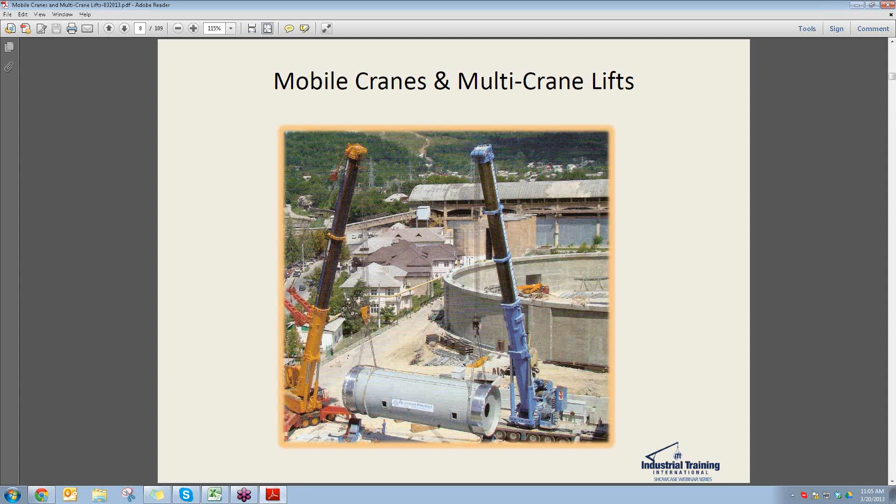Just a note about the slides here. A lot of these slides are mine, and a lot come from elsewhere, but they're picked to prove a point or expand a concept. Most are from the petrochem area, mainly because that's where the photos are. But just because everything's big, long, and heavy doesn't mean the same principles apply throughout the industry, whatever you're lifting. And although you'll see cranes with names on them from Europe or South America, I'm not advocating any one.

When we talk about multi-crane picks, they're not as prevalent now as they used to be. In the past, they were prevalent because there weren't too many options. Some of those options were some of the most basic lifting devices that have been around for decades and even centuries. First, I want to talk about a few of these.

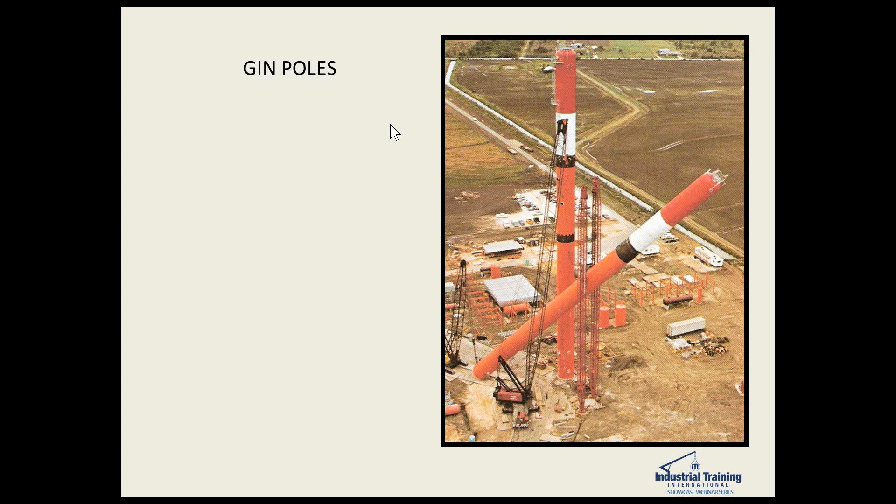First is gin poles, a beautiful arrangement of equipment where they take a pure compressive load and have tremendous capacities, but they're terribly inflexible. You also have stiff leg derricks, an amazing piece of equipment that works much like a crane, except their swing radius is not very large. When you start getting toward the lay legs, capacity starts dropping off quite quickly.

Then we have the guy derricks, which any of you engineers may recall from your statics classes, real and theoretical problems involving guy derricks and other kinds of derricks. Here's an example of a guy derrick lifting, with the loads being tailed by a stiff leg derrick. So this is a pure derrick operation.

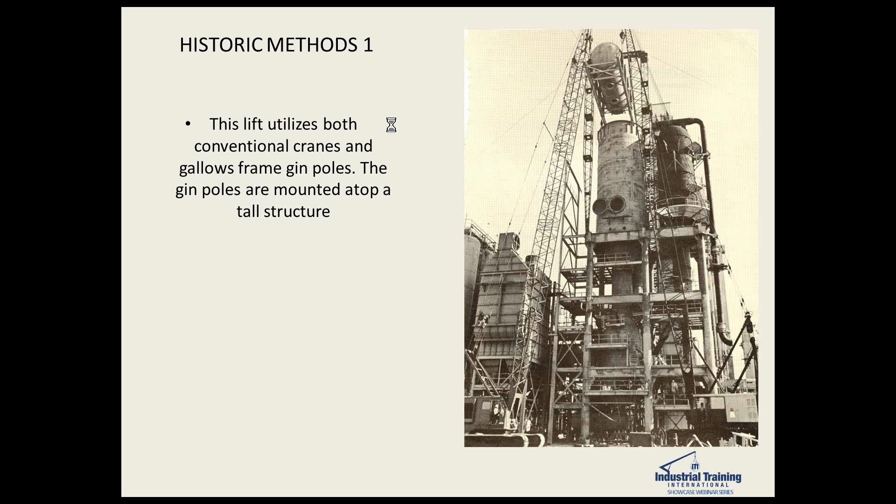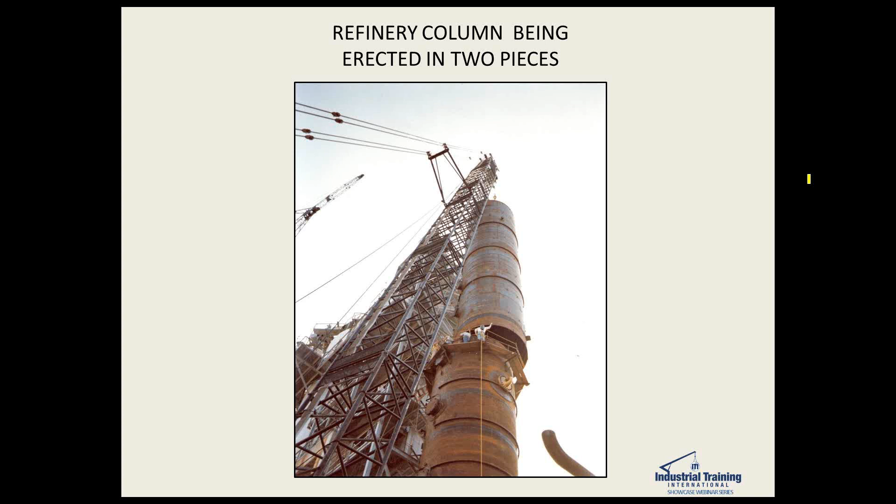Also, previously, a lot of pieces were erected in pieces. This is a typical example, a refinery column being erected in two pieces. And also, multi-crane lifts were popular. Here's one - I would guess this is probably post-war, sometime in the 1950s, from Denmark.

But I do want to point out, and I'll try to point out a few things every now and then, this excellent use of equalization on the rigging that they've used here to spread the load out properly.

In general, on two-crane lifts, some points to remember: keep level. The movement or motion of one crane may affect the other. The cranes should be derated. Most tandem lifts are considered critical. Some people - I've seen at least one case where someone banned two-crane lifts, period. I don't particularly agree with that, but I'm sure that's what this person, or this company, felt was correct. They require a high degree of planning, and if possible, try to balance the cranes' percentage of chart one to another, to equalize the lift between the two cranes, especially when you have two unmatched cranes.

The load falls need to be plumb or almost plumb throughout. The attempt is to keep them purely plumb. And in general, for every advantage gained with the two-crane lift, there may be a corresponding disadvantage.

Now I'm going to start with the lower risk items and work up to the higher risk multi-crane possibilities.

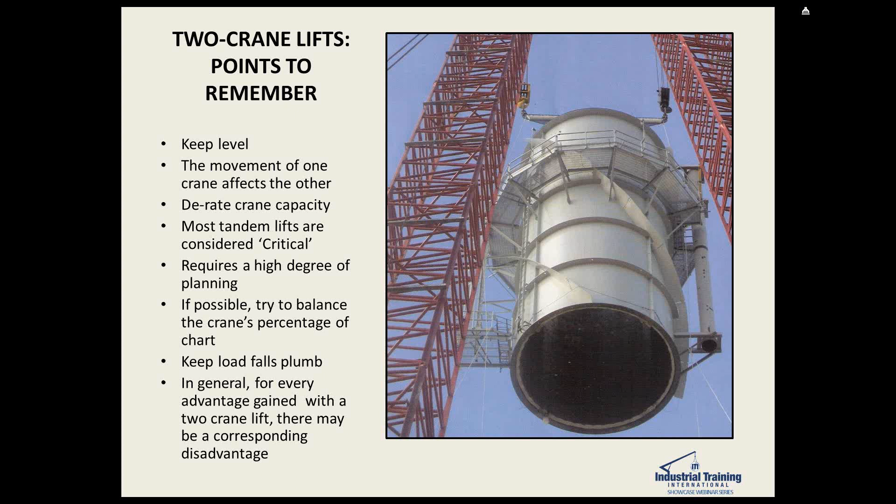Another important concept to keep throughout anytime you're thinking about multi-crane picks is weights, centers of gravity, and load distribution.

Now this case looks like a difficult piece to develop the center of gravity for. It's not really - it uses the same concept that anyone would use for a plate girder with stepped flange thicknesses, or a structural frame, or a container full of bulk material, or even a population center of the U.S. The same concepts apply. I do want to point out one thing here on this vessel, not applicable to two-crane picks - notice they have tailing trunnions, which are really a bad idea, and we'll see an in-use picture of that later on.

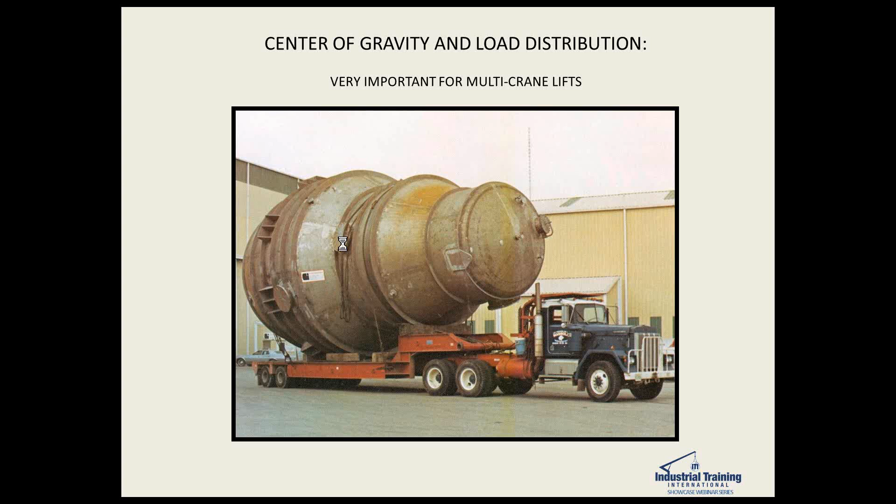Here's a case that happened within the last month. It started out as a single crane pick, but apparently the engineer of record did not tell the crane company where to pick up the load, nor did the crane company ask. When they picked it up with one crane, there was severe bending of the lower chords and the smaller members as well. They placed it down, and you can still see the lower chord being way distorted, and they're hooking up now for a two crane pick. I don't see any evidence of tie-off, maybe there is, I don't know. Here's a typical two crane pick, two crawlers picking up a large vessel just to pick it up off of the saddles.

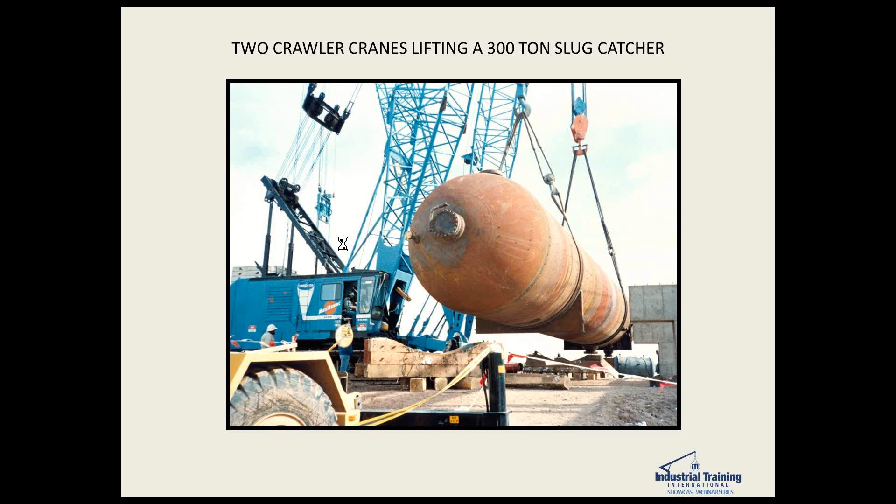Now, when you're working opposite like this and the hooks are closer together, any harsh movement in one crane might affect the opposite crane slightly more.

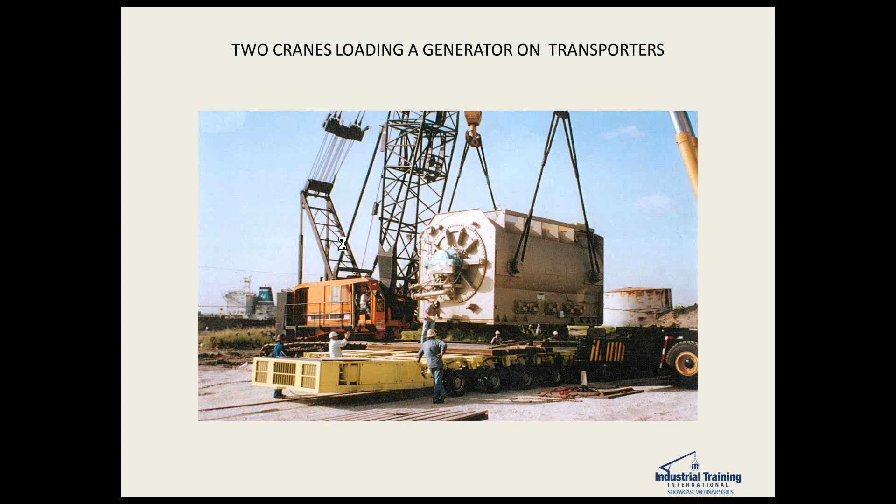Here's another case, setting a horizontal tank on the foundations. One thing that bothers me though is that they've got the rigging so close to the end here that if anything went wrong, they could have easily lost the load. Apparently they didn't, but that possibility still remains.

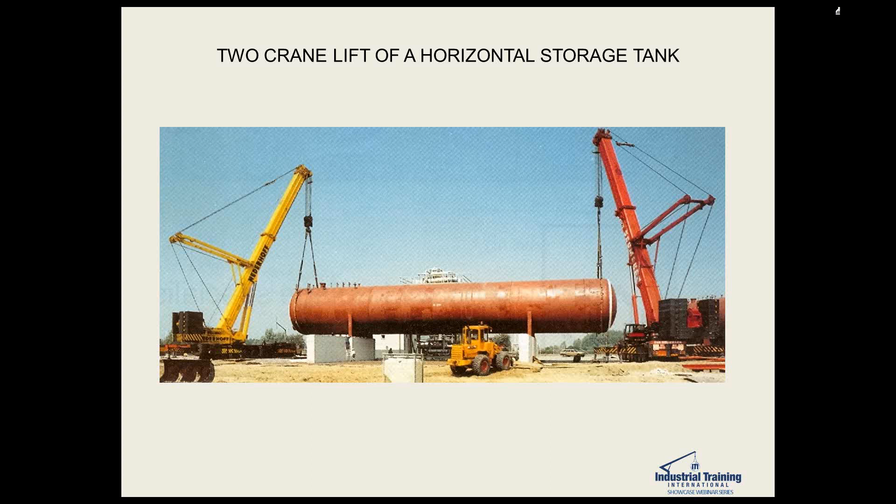Another good use for a two crane pick: here's a vessel being offloaded from a barge for highway transportation. To get it rolled to the right orientation for highway transportation, they used rolling sheaves, or snatch blocks is an option too for doing the rolling, and it can easily be rolled with the whip line. You don't see the whip line here because they've already got it into the orientation needed for transport.

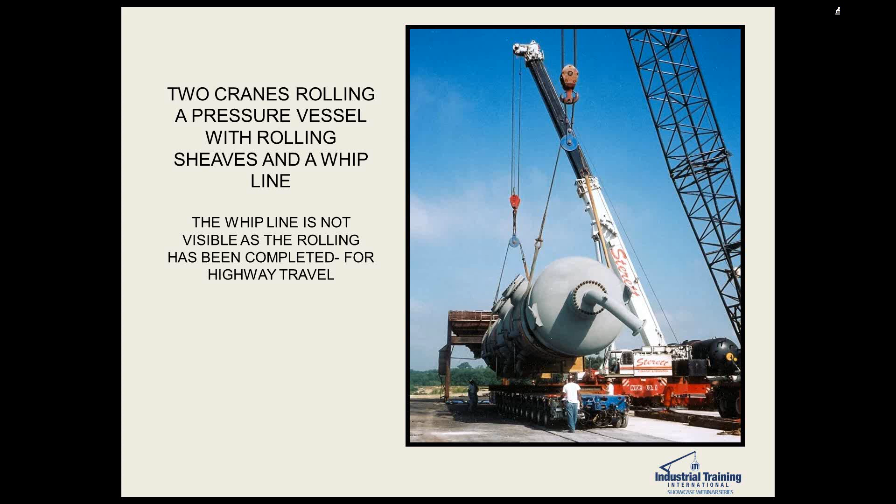Sometimes on a load like this, one end will be placed down before the other, which is fine, but there are rare cases where, especially if your center of gravity is way offset one way or another, you could actually wind up getting more load on one crane than you did before.

That same concept could apply here. This is where you have two cranes, one end has been placed down and they're getting ready to set the other end. I don't know what the distribution between the cranes was, but I'm sure this reliable contractor calculated the load in the cranes before and after the one end was set down.

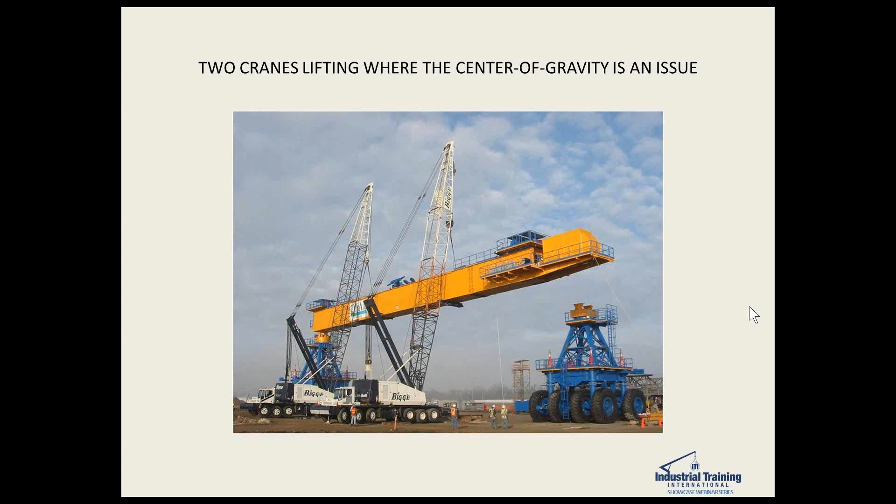Jim, this is Mike Parnell. This is an excellent observation of where the crane on the left, if he lands the load, then the crane towards the right may end up with 90% of the load -- right before he gets his end set down. It all depends on the CG, and all of it, and it's totally possible. You could double your load in some extreme cases. Right.

This lift was best for two cranes because of the multiple lifting points required. I'm not sure whether there are 8 or more lift points, but one crane could do the job -- it would just take quite a large crane with a lot of headroom to get all of your special rigging hooked up to it, and you'd increase your load with the weight of all the rigging.

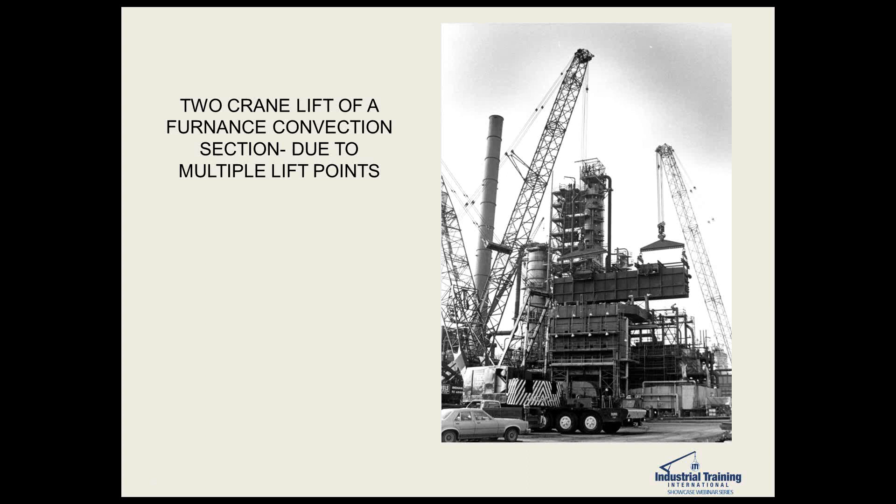This lift, although it's a two-crane pick and a horizontal lift, the cranes really can't see each other, so the signalman has to be very skilled for this. Also, it's high, so they need a second person to direct up on the roof.

Here's a very good example of where a two-crane pick will usually be preferred, rather than trying to put this enclosed conveyor section at the desired angle and have to deal with chain falls, come-alongs, and special rigging that may or may not be properly calculated.

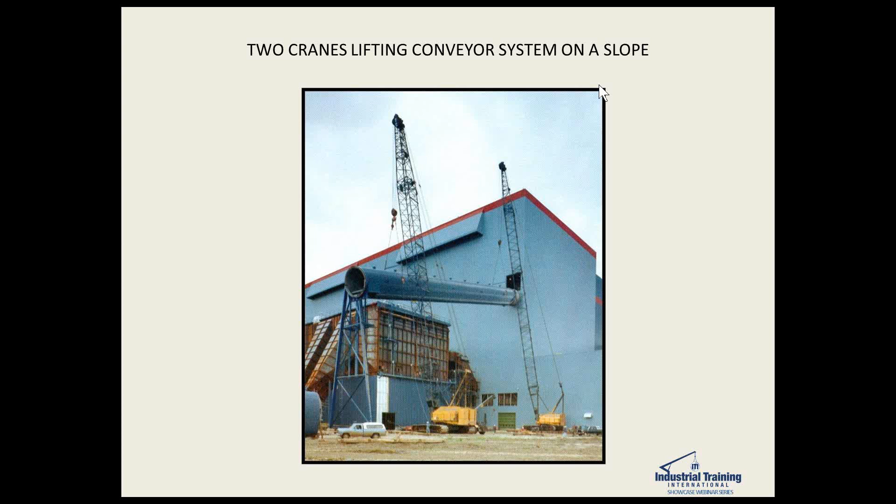This is a case I've only been involved with once, and I never want to be involved with one again. This is from when cranes were much smaller than they are now. A 75-ton vessel had to be moved from the roadway into an enclosed area inside a refinery. A 200-ton crane on the right took one end, and a 60-ton crane in the street picked up the other, transferring the load midway to a 140-ton crane to bring it into the enclosed area. The problem was that if this had been dropped, the explosion would have made world news, because there's a 600-pound ethylene line there.

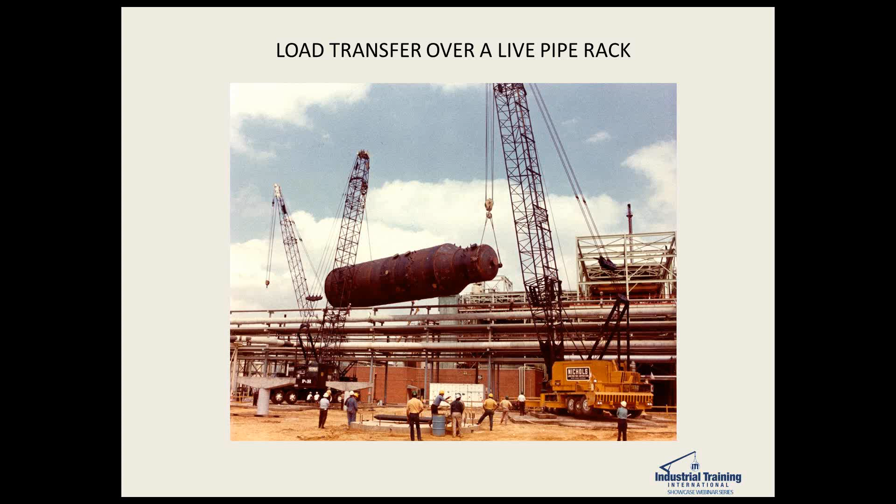I'm going to stay on docks for a minute, because docks have several unique properties, whether they're structural docks or landfill docks. Nearly all docks are going to have a fender system of some sort, which is going to increase your radius somewhat - maybe 3, 4, or even more feet on some docks.

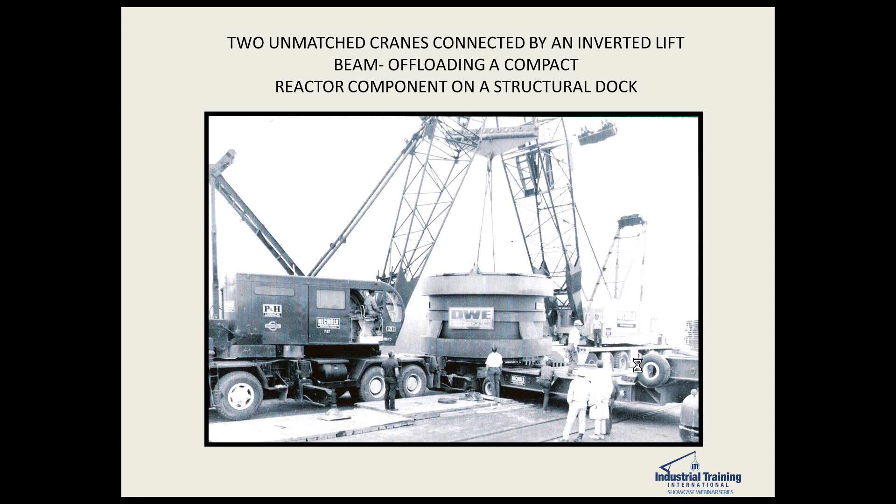This was what I was involved with some years ago, but it would have been better if we could have had more room between the two cranes - we would have gone out of radius on one of the cranes had we done that. Here's a similar case where it's a landfill dock, but it was really the radiuses of the cranes that caused them to be closer together.

Another swing through - you can see from this picture how the crane operators really don't care for this kind of lift too much, because they're sitting there looking at this vessel right in their face the entire time. Unfortunately, the railroad track is in the wrong place to put an outrigger, and railroad tracks are always the most fortified part of any dock if it's a structural dock.

I'm showing this picture because this vessel happens to have a center of gravity close to the bulb end, so almost all of your weight is back here. So the larger crane - you'll notice he's picking way back up here - they have to be very careful on the swing through to make sure there's no interference between this end and the crane. I think they're going to lead with this end and come on across here.

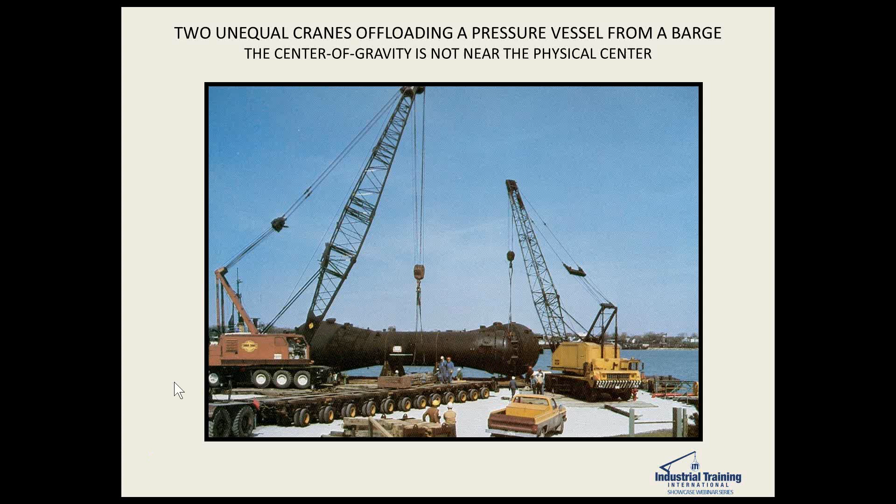This is a little bit more complex situation with these mooring piles - 4 to a barge, 21-foot diameter and 270 tons, so they're pretty hefty pieces. The 2 unmatched cranes here have to do a lot of shuffling, and also the barge has to be shuffled around to make sure all of the yellow ends are lined up.

In this case, this shows the outside or outboard piles being loaded on, where the cranes can work in the conventional mode with the 300-ton truck crane and with the Skyhorse here.

But for the inner ones, which are actually the first ones to be set, the crane switches places or with the more mobile truck crane moving to one end, and the Skyhorse actually hooks up the counterweight, which is what's called a sky derrick, which gives him additional capacity.

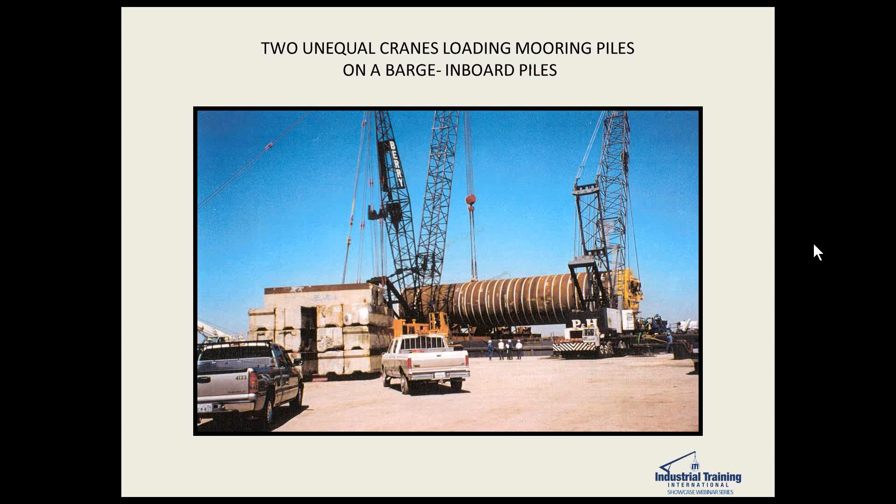We get a little more higher up the risk scale here when we go with vertical vessels, and here's a near ideal situation where two totally matched cranes are picking a relatively short reactor with relatively short booms. I do want to point out again the excellent use of equalization on the rigging here.

Here's a picture showing two matched cranes lifting a taller refinery vessel, and another with one, but the difference is this one has lifting lugs down on the shell, which results in two key things. One is it reduces the tail load considerably, but the second is a disadvantage, where anything above the lift points may interfere with the rigging, the block, or the lower block, or even if it's tall enough, the upper block.

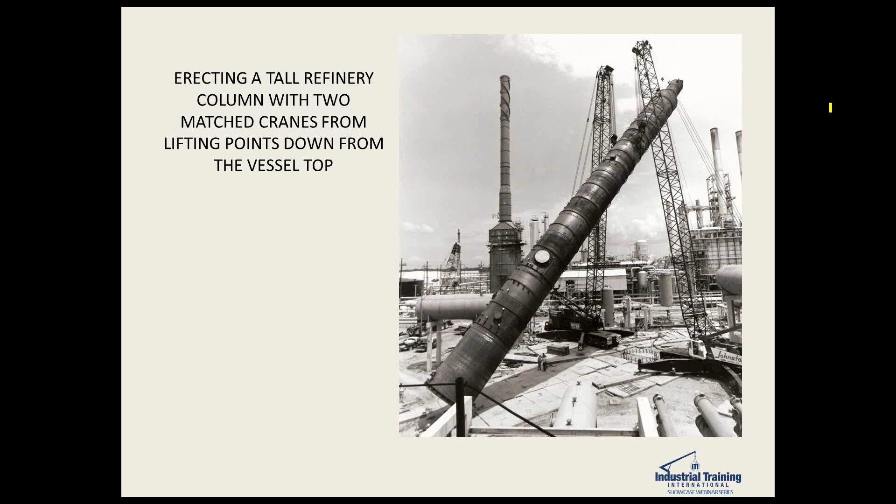This tower is 206 foot tall, so it's a pretty tall tower. This concept's also very useful for flare stacks, and you'll see this with flare stacks a lot, because some of these flare stacks get up to 300 feet, maybe more in some cases.

Here it looks like they have some dress out here, but not too much, that could interfere with your load fall. The key point is to make sure your lift points are always above the center of gravity, or then you've really got problems.

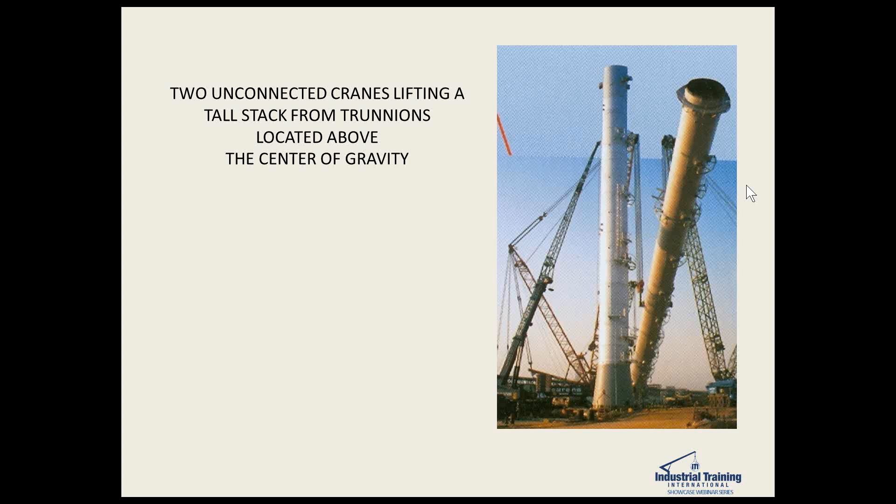I'm showing this picture here because in today's world, this would be a much better lift if it were a single crane lift. And I say this because the two lift points are so close together, there's a good chance of the booms interfering with each other. But it looks like it's well planned and things are going well.

This one's a little bit different. This looks like it's a uniform vessel. This is a used vacuum tower that came from Philadelphia to New Orleans, but due to the internals, mainly cyclones, the load distribution on the lift lugs was 57% and 43%. So we place the larger crane on the heavier side and the smaller crane on the smaller side. It's rare to have a vessel like this, but it does happen.

Here's a case using two guy derricks on crawler cranes lifting a large cat cracker reactor. And I want you to note that the two cranes are tied off here, which actually acts as guys. This concept of tying the two cranes together limits the cranes to some degree.

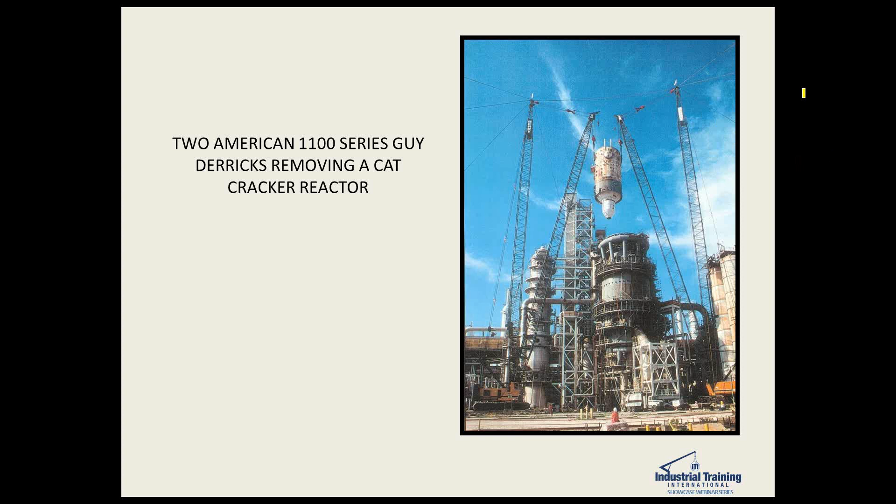But here's a case where the two cranes are tied together with an inverted lift beam, which enables one to make adjustments. Here, the larger crane, or the crane at the shorter radius, depending on the situation, is able to more equalize the load between the cranes by this simple method. We'll see more pictures of this as we go on.

With domes and rings, the inverted beam really helps a lot. It increases capacity by reducing the boom length, and it increases capacity by reducing the radius of each crane. But there are some disadvantages involved with that also.

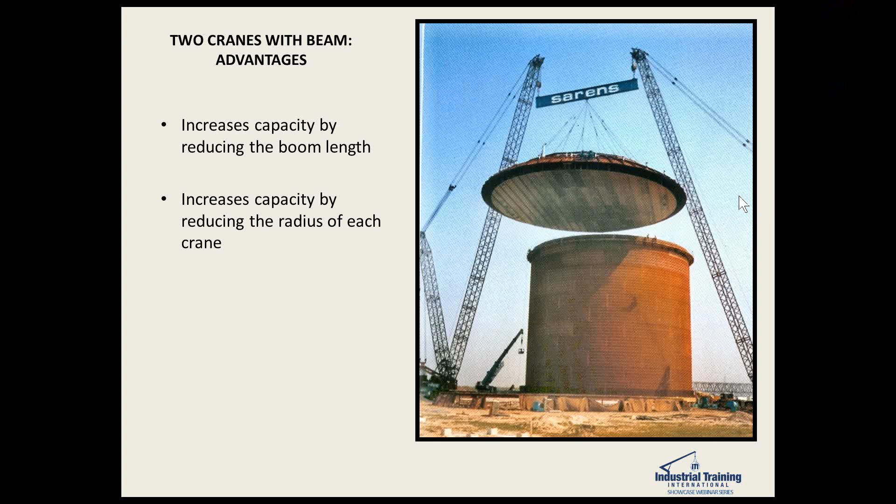Namely, the swing of each crane is somewhat limited. They can't go 360 or anywhere close to it. And the limited rotation of the load could be alleviated with a swivel, but I don't see a swivel here. And the communication and signaling requires a higher degree of planning and ability.

This is a more sophisticated lifting frame connecting the two cranes. NASA has this one. It's got three large load cells on it. You can see one here and one here. Plus, NASA, being NASA, has several measuring devices here and here where they are measuring everything, including the amount that the crane booms deflect during the lift. I think for the larger crane here, they calculated something like 18 inches deflection on the top, which we really don't see from the ground.

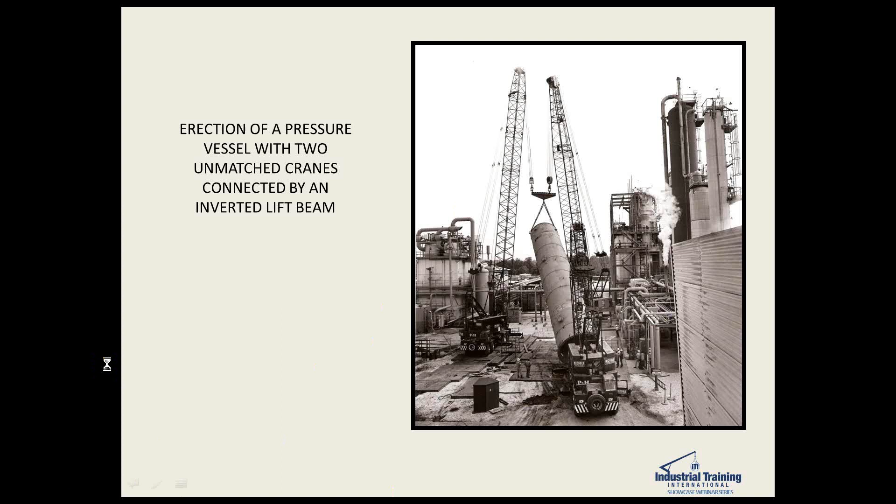Here's an example of a pressure vessel erection with two unmatched cranes with the inverted spreader beam, but this is on a vertical piece rather than a horizontal piece. But this concept doesn't have to always be used for pressure vessels. Here's a press in Germany shown using the same concept of the unequal cranes and the uneven beam.

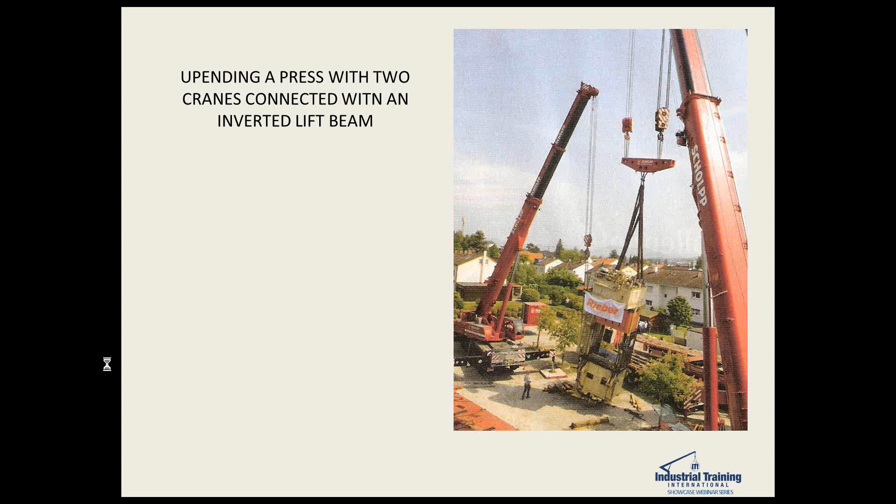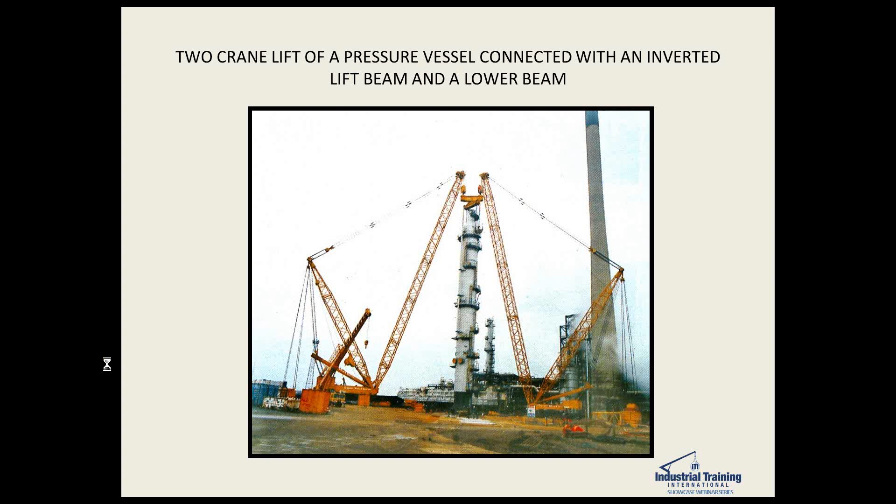I'm going to work my way into tailing, which I'll cover with quite a few slides, but I'll start it off with what I would call flipping. A common example of flipping is taking a short piece and going from one orientation to another, in this case horizontal to vertical, and a two crane tilt-up fits the bill pretty well.

Secondly is flipping a cone section, and I know there are other terms for flipping. Like most terms, they are regional and can change throughout the country or around the world. Another case is a crane pick lifting a bucket wheel, going from the horizontal to the vertical.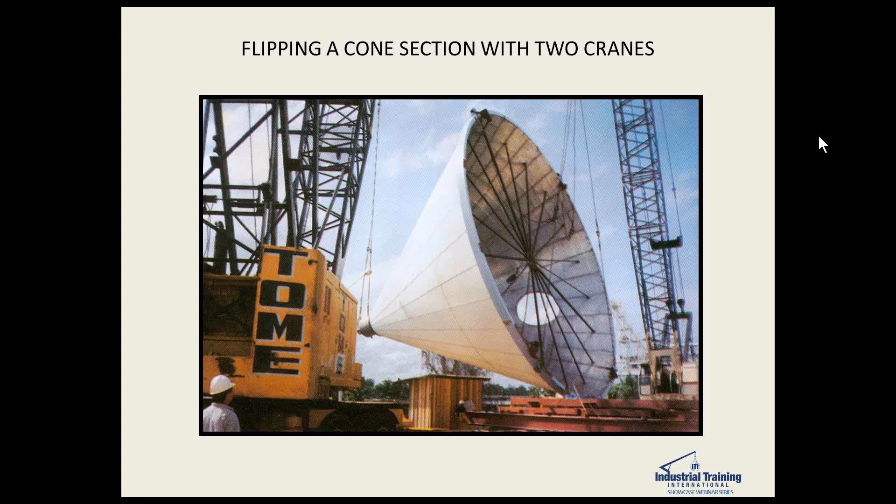We go into tailing, which I would define as taking a longer piece and going from the horizontal to the vertical, or if you're taking down a piece, going from the vertical to the horizontal. But tailing requires a higher level of planning, engineering, communication, and execution.

And the load falls must be plumb. This takes a little work, because as you change the orientation of this vessel or any piece in the vertical plane, the distance between your two hooks is going to reduce.

One should work slowly, performing only one function at a time with each crane. That doesn't mean both cranes can't be doing one activity at the same time as the other — in fact, that's almost essential to do. And as we'll see, the load distribution varies throughout the lift. The signaling here is of most importance and should be performed by only one experienced person.

This is a typical tailing chart showing how the load changes over the degrees, measured from the horizontal. This is approximately a 700,000 pound vessel, but the same concept applies for lighter pieces or any other load. Although the geometry may change for the piece of equipment, the curves are pretty much going to look like this.

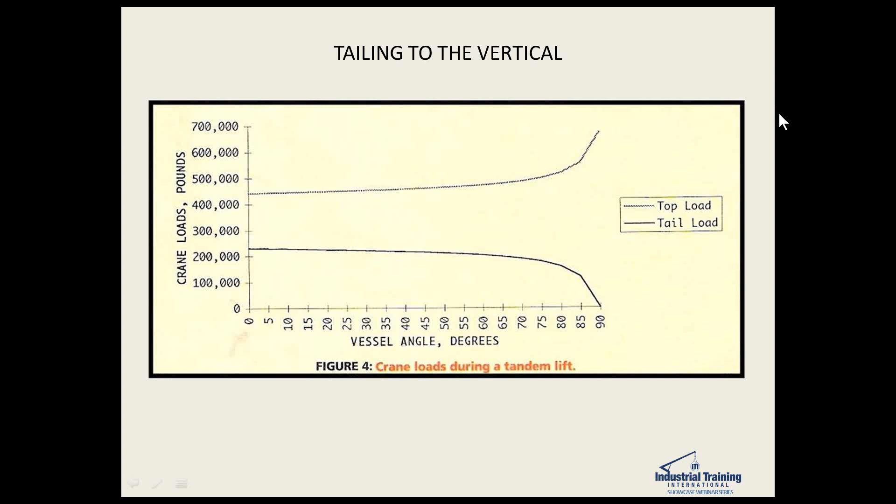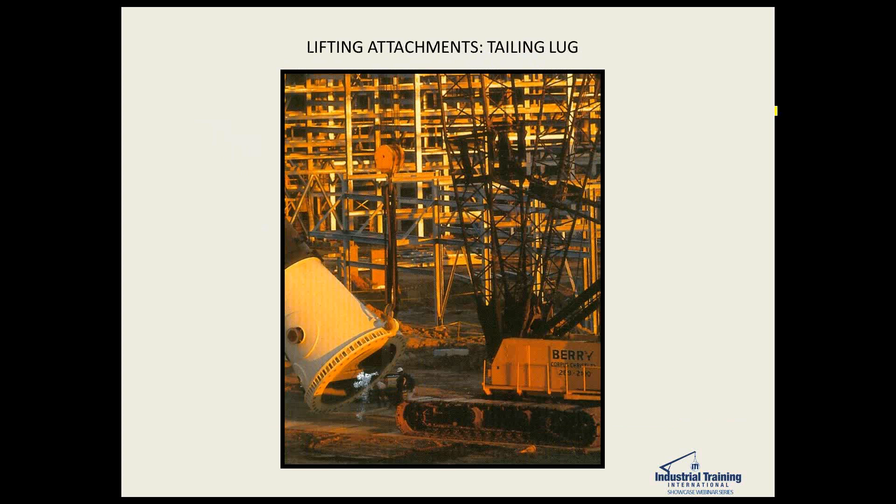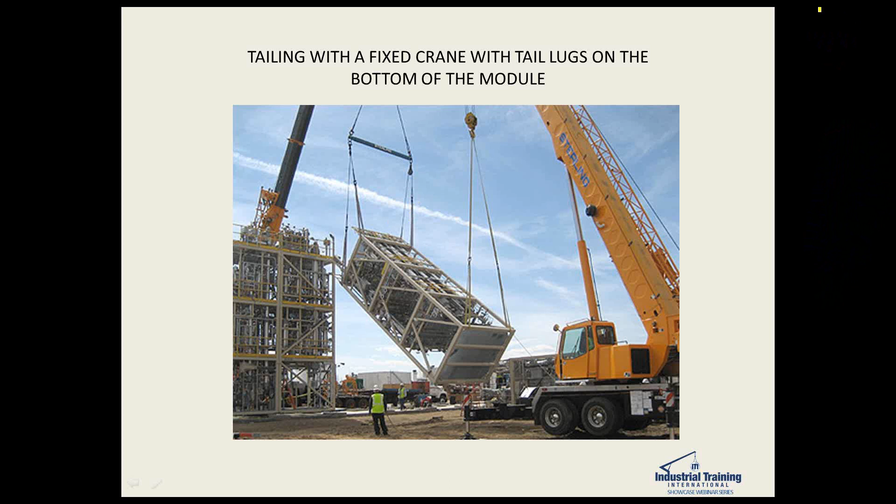Here's another extreme example of that, where it's better to tail from the side rather than tail from the end. And one more case, because it looks like whatever this is, it appears to be a roadway or something of some importance marked here that they do not want the tail crane to be on. This is also a two-crane lift as well.

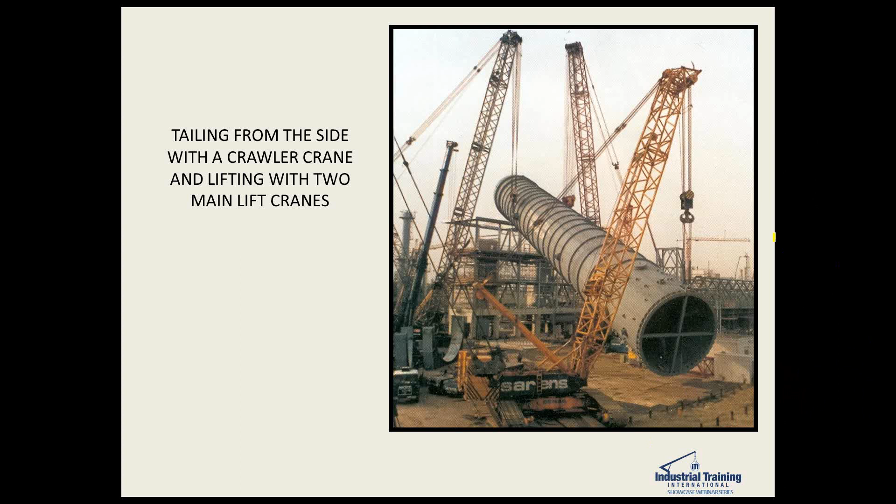Here's a situation that I like to do if there's any chance of doing it. The tail crane is back here, it's a red and white Link-Belt, and your main lift crane is here. But when you pick up, the lift crane is going to basically do most of the work. He's going to be picking up and swinging, while the tail crane back here is basically going to stay in one spot and just hold on to the load, boom up a little bit or make small adjustments. Here's a picture of it a little further up in the air. If you have the room, it's a nice thing to be able to do.

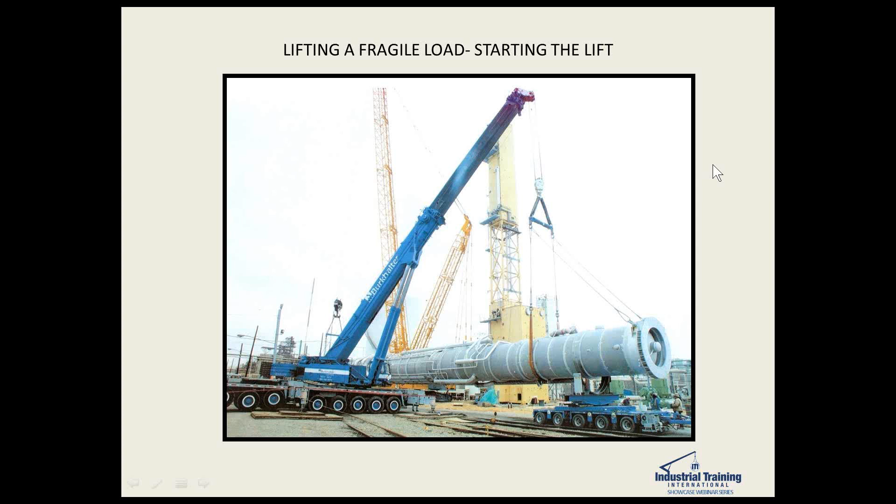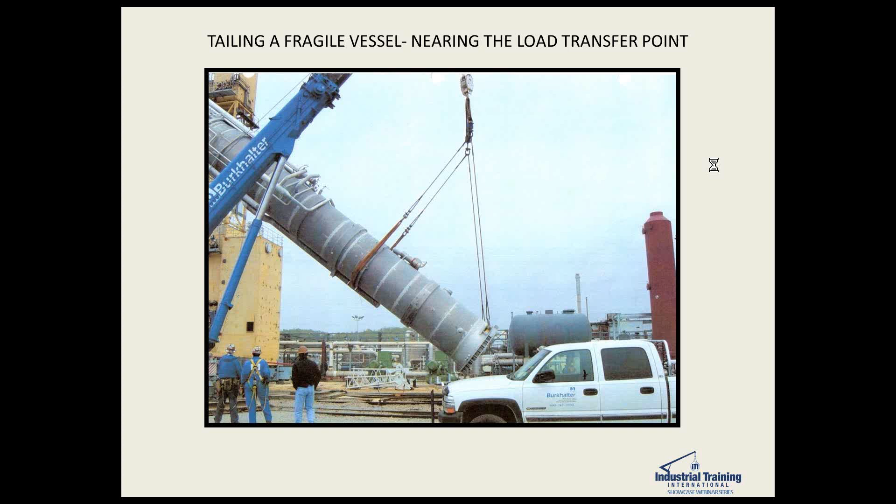We decided we'd use two pieces of rigging, one connected to the base and one cradled about 20 or 30 feet up. At a certain degree, this rigging would slack off and this rigging would take over, if you can see that yellow there. Now here's a picture of it. It looks like it's right at 45 degrees, or pretty close to where the transition point is, and just a few degrees more you can see where it slacked off, and we went ahead from there.

Another situation with tailing too, where you have enclosed spaces. This was a fairly large tower back when. I'm going to give you the dimensions: the tower was 232 foot long and a 230-ton tower.

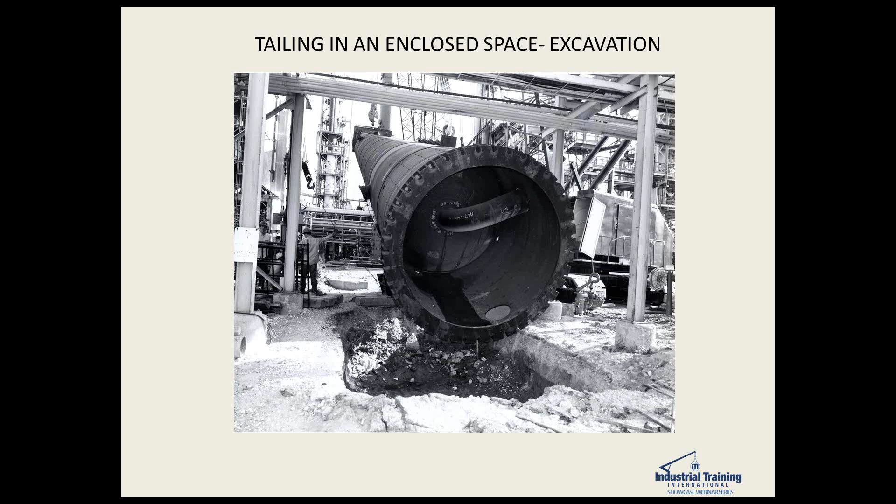Here's another enclosed area, and there's another little lesson here too. This is taking down an existing pressure vessel. We asked the client: are there any solids in there? Are there any liquids in there? When we got to this angle in the process of coming down, you can see the wetness here.

Water gushed out for at least 30 minutes at a high rate. I don't know how many gallons there were, but luckily we had the crane capacity, an excess capacity at first, to not have a problem.

But it was still very difficult trying to tail down in this tight area because we had to come out through here, and the tail end, or the head end, had to come on this 2-axle 16-wheel dolly. Here you can see it in sort of an intermediate stage, and the tail crane had to work its way out of there as this end came to the dolly.

This picture shows a vessel with what's called a top head lifting attachment, which you might see frequently on heavy wall vessels that use body flanges instead of traditional standard flanges. What's good about this lift is they have 2 tail lugs, which gives you a triangle of stability. Here, 1 tail lug here, 1 here, and 1 here make a triangle.

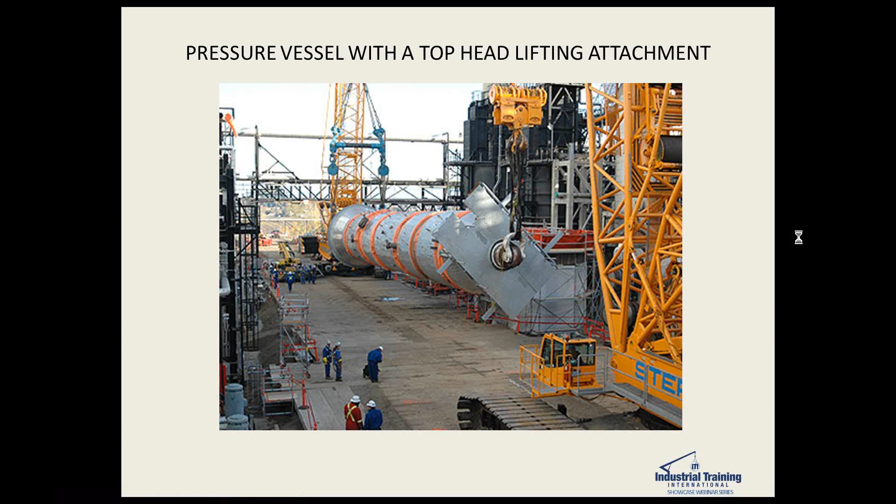Now, if this vessel were to have a tail lug like this one, and if you had anything on the side, any dress out or any protuberance here, you could have the possibility of a torquing motion, which you do not want.

Now, here's a case where, because of this large flange here, that situation does exist. And this wasn't the only reason why this was a tough job. One is you've got power lines here that knock out your access. The fence line here is over about a 15-foot drop to grade. The main lift crane has limited travel because of severe underground activity, and the foundation is here.

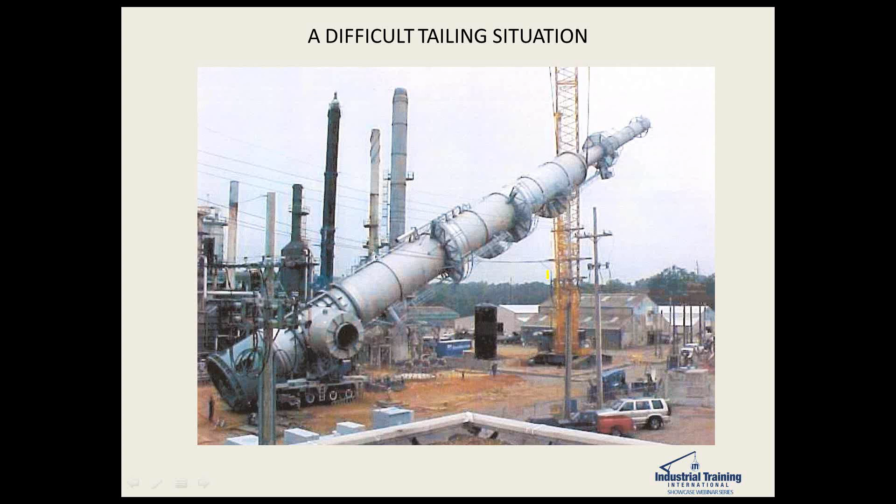Also, the tail lug is high up, which means that the tail crane is going to have a larger tail load, and he doesn't have much room to work around here. One more thing too: the client insisted on putting this top platform up here, which means for our rigging we had to have a spreader beam up here that would miss this, and also take into account that we knew the stack was not going to hang plumb because this big nozzle here was going to knock it out. So here we show the slings passing by that upper platform.

This is another real-life story, and it was a mistake on my part, where this 300-ton reactor should have been a pretty simple lift. You see right here some low-level power lines that basically were just going to a service drop for a light, an outside light over a warehouse door. But I did not include in the bid a stipulation that the client would remove this line, even at our cost. The client said no, to be fair to the other bidders, you can't take the line down.

So that meant we had to put a tail crane on the other side of this pipe rack, far enough back so that when he boomed down in tailing he would not hit the rack. It's a small rack, probably actually a cable tray rack rather than a pipe rack, but still it was an unnecessary expense and aggravation we had to go through. My lesson was: never assume anything anywhere.

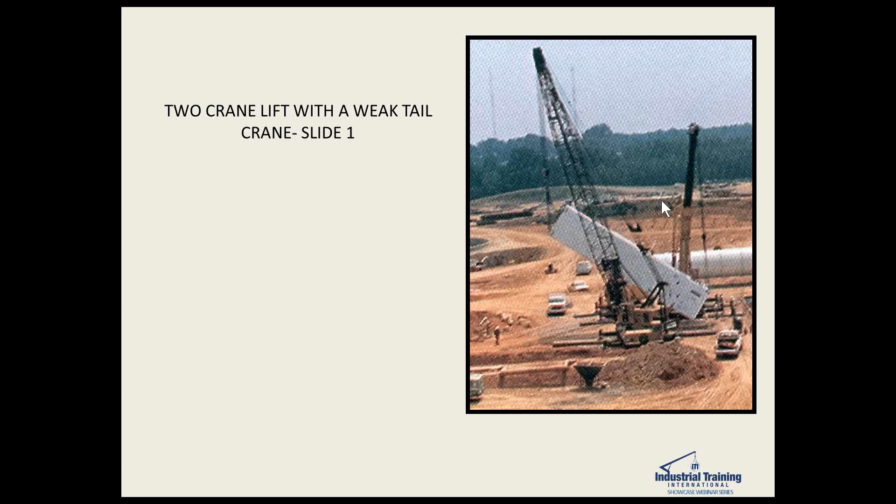These aren't very good pictures, but this contractor apparently had a weak tail crane, so he compensated by putting the tail crane right next to the foundation and the head of the cold box over here where the two stronger cranes could pick it up and swing it into a vertical position over the foundation. Here's the second picture showing just what they did.

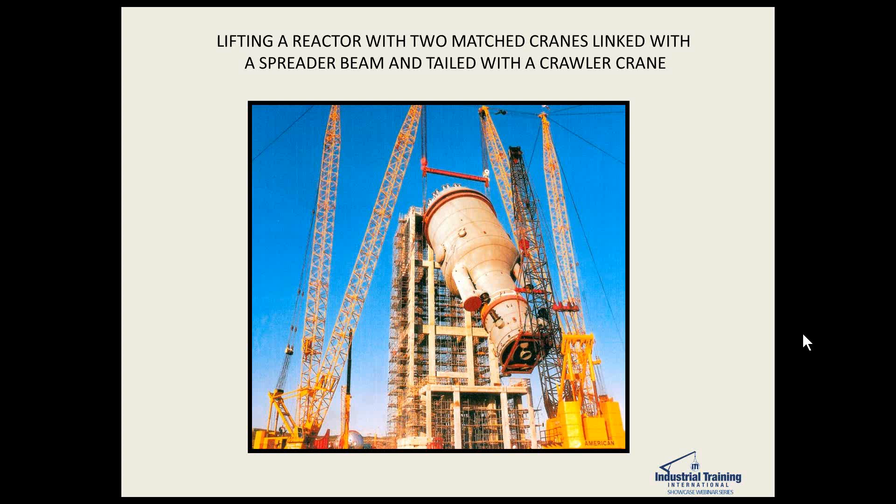And they are doing a good job of keeping the lift beam level. Here's another case of exactly the same thing, but using an inverted spreader beam and two highly mismatched cranes, where the larger crane is actually right behind the vessel and the smaller crane is walking along the side.

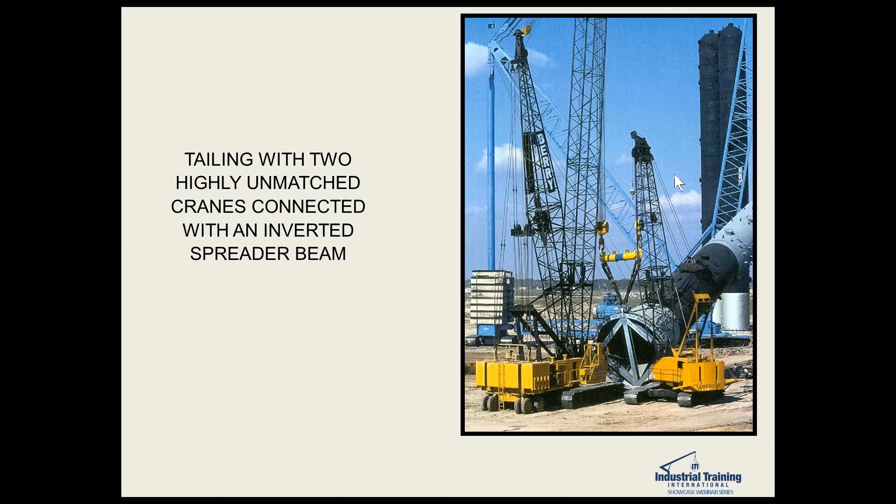Jim, let me ask you a question. Do you run into many circumstances where your trunnions, when we're running a basket hitch around, are pretty robust with the sling contact there, where they're not really ripping wires too much or sawing into the trunnion very much? A pretty good interaction between the slings in your experience?

Most of the time, what I've seen people use is either heavy grease bags, or a Teflon or similar material lining the trunnion to where you'd have better lower friction. Yes. Yep.

And sometimes you're not tailing with a crane, but with a tail frame. Usually this is for your much larger pieces, and one disadvantage of the tail frame, this is just one of many examples, is that you don't have much flexibility. The tail is pretty much in a straight line, so you have to be aligned nearly perfectly to make it work.

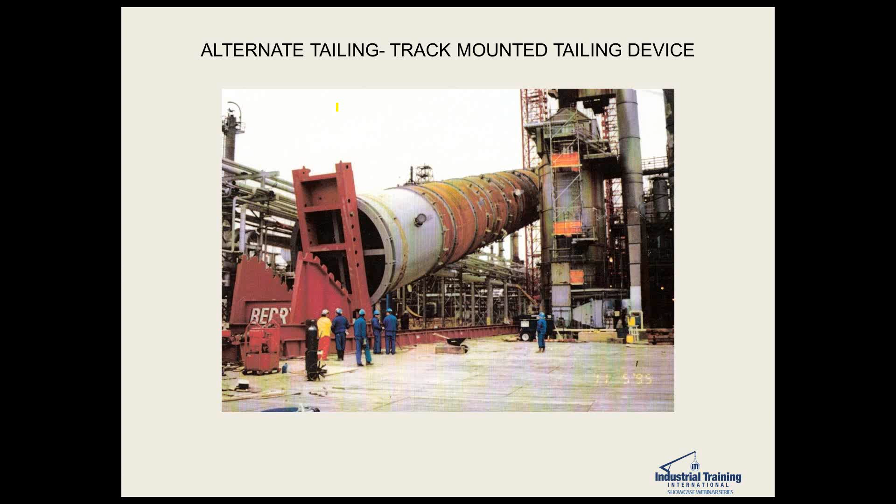If you use this example where they have the tail device on transporters, you have a little bit more flexibility.

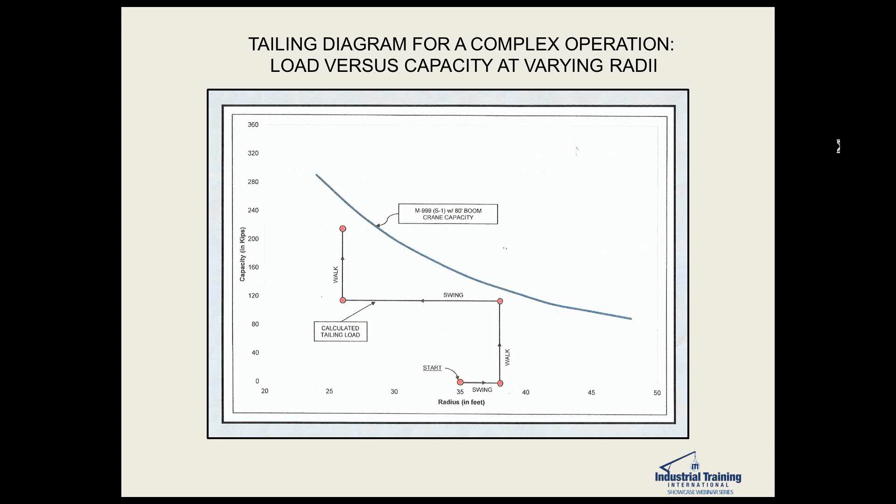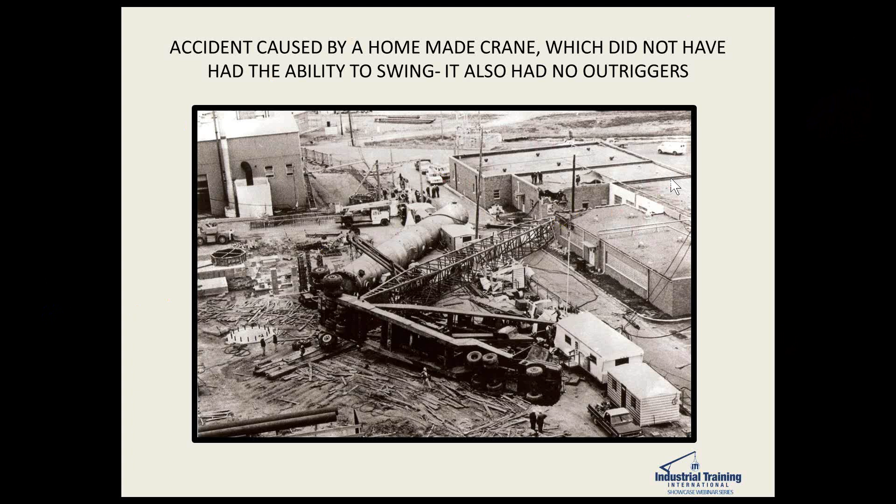I do want to take a little time to talk about rebar cages, which I don't like because they're non-rigid lifts. I have to give credit to the crews for having to deal with these, and based on their experience, they really do a good job. But if you took a closer look at a lot of these operations, you would find issues.

Now we go into multiple crane lifts, which I define as more than 2 cranes. Except for roll-ups, lifting up and down should be the only actions allowed. Take into account there has to be some minor movement for modifications, a little shifting here and there to get everybody plumb, everybody level. And derating the cranes is essential.

I don't know what that amount should be. It really depends on the owner, the contractor, whoever's doing it, what the risk is assumed to be - maybe 75%, 70%, 65%. I'm not sure. Here, your planning, communication and signaling are most important, and determination of accurate load distribution is necessary. In this case it shouldn't be too difficult, but on an offshore platform or something like that, it would be much more difficult.

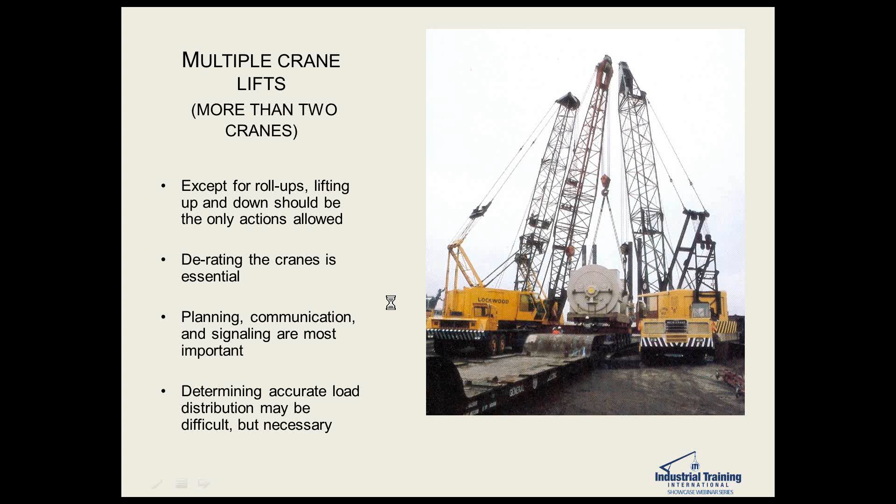Historically, here's a 3-crane pick that was made because that's all the cranes they had at the time. I don't know where this is or what year it was, but you can see the 3 cranes, and 2 are linked together with an inverted lift beam.

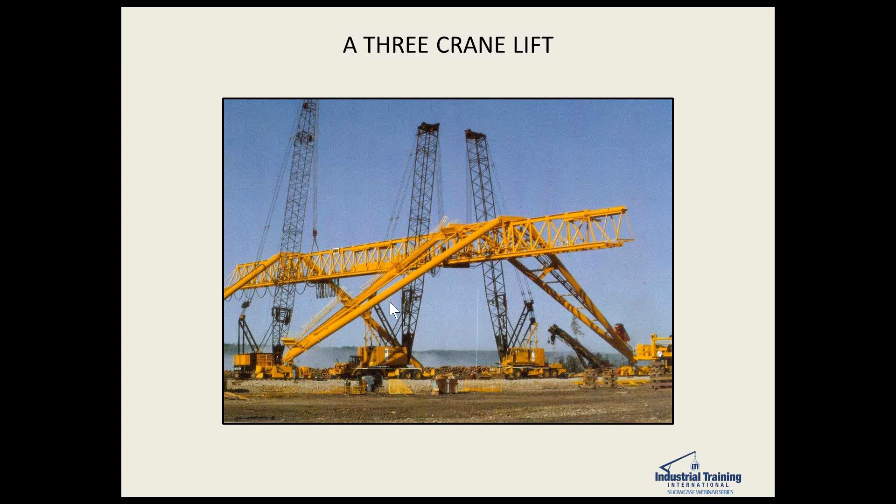Then we go into offshore roll-ups, where multiple cranes - usually American Sky Horses - are used because they can walk and have good capacity. The coordination and signaling here is naturally of much importance.

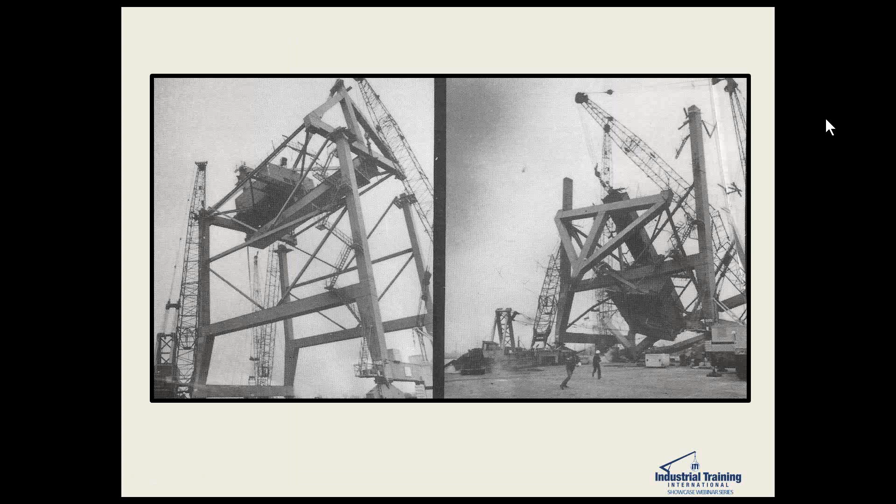In conclusion, in general the use of multi-crane lifts has decreased in recent years, but the need for such lifts remains. If a multi-crane lift is the best solution, the planning and execution must be elevated to a higher plane. This includes an emphasis on weight, center of gravity, and load distribution, as well as planning for all movements and situations, communications, and signaling. And remember: go slow, keep it level, keep the load falls plumb, and attempt to minimize executing more than one task at a time with either crane.

And Zach, that's the end of my presentation. Perfect, Jim, thank you so much. I hear the crowd going wild.

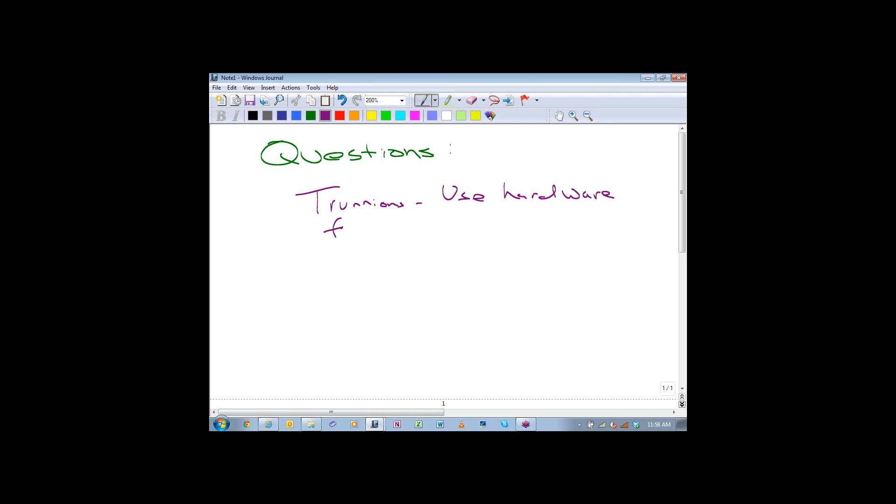Joe Collins wrote, the problem with trunnions is that they are not a secure connection - I prefer pear-shaped links that can slip around the trunnion. I know Joe and Ken were both referring to an earlier slide, so I wanted to comment on that and share it with you guys if you had any thoughts. Well, if this were a presentation on rigging, I would have had a slide showing exactly what Joe had in mind there, but because I do like that concept - you don't see it that often - to me, it's the best.

Yeah, Mike, looks like you're drawing something there. Did you have any comment?

Yeah, I think Joe's got an excellent idea and approach, and Jim uses the same, but it would be shackled in with a large master link, some suitable hard link that would accept the trunnion contact surface, and you wouldn't really need to worry about abrasion or other issues related to scrubbing and making the 90-degree turn. So that's an excellent way to mitigate the issue related to some of that damage and sawing effect.

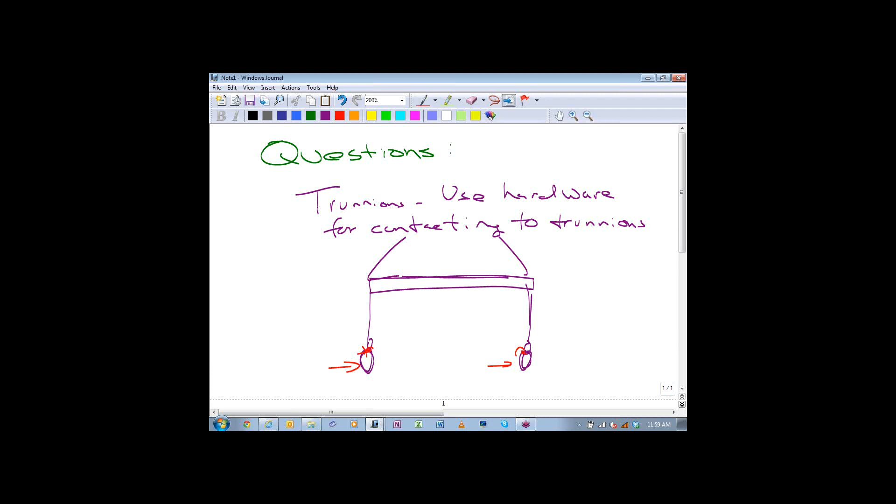Good point. Well, thanks, Joe. And you guys, I'm sure, saw Ken's comment. He said yellow 77 wire pulling lube is very slick, dissolves with hot water, and is environmentally friendly. He was referring to a slide that you had, Jim, there.

Well, I guess that's a comment on your question concerning what to do with trunnions. Right, grease or lubrication of some type.

Yep, good. Okay, let me hop into some of this. Joe just mentioned that also the sling can slip off if there is any slack, so that's obviously another issue around trunnions.

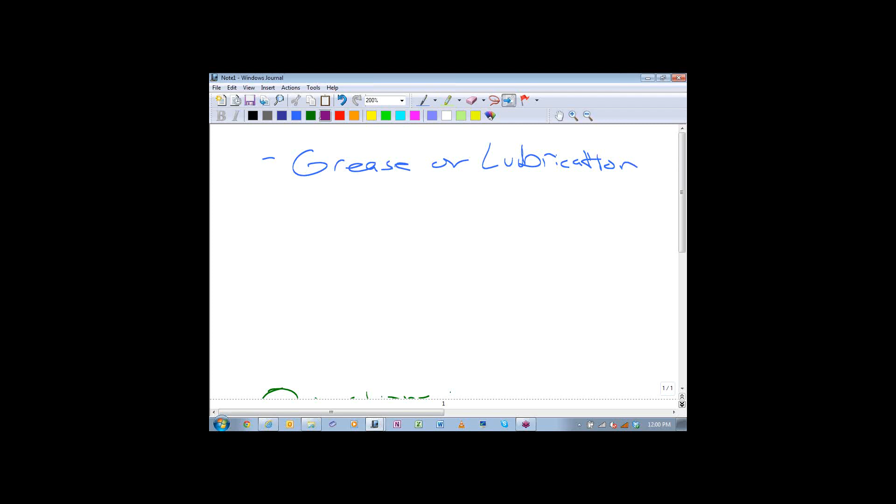So we had a question come in from Dan early on in the presentation. He asked, basically, you've got to go back in the slides to remember this, but tailing cranes can have excessive loading at the near vertical vessel position. What would be a good crane capacity percentage for tailing cranes?

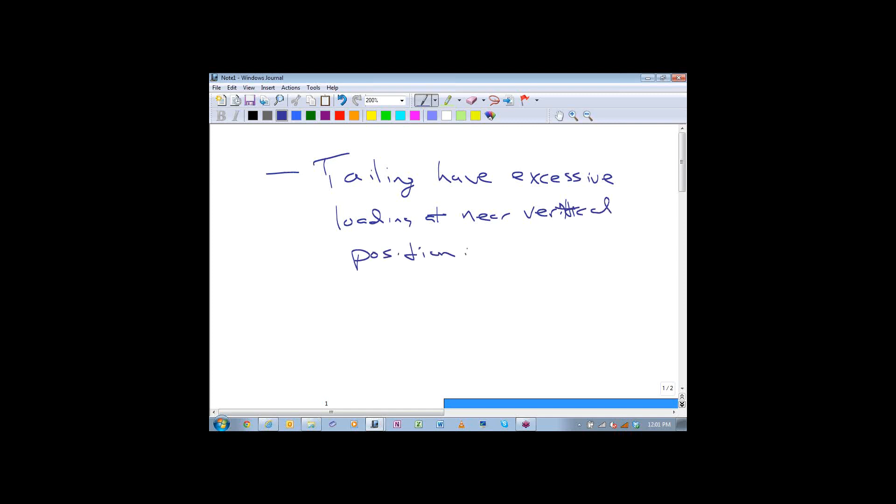I would say that the tail crane should have the same limitation on capacity that the main lift crane would have, depending on the owner's or the contractor's own specifications. 85, 75, whatever it happens to be, 80, 95.

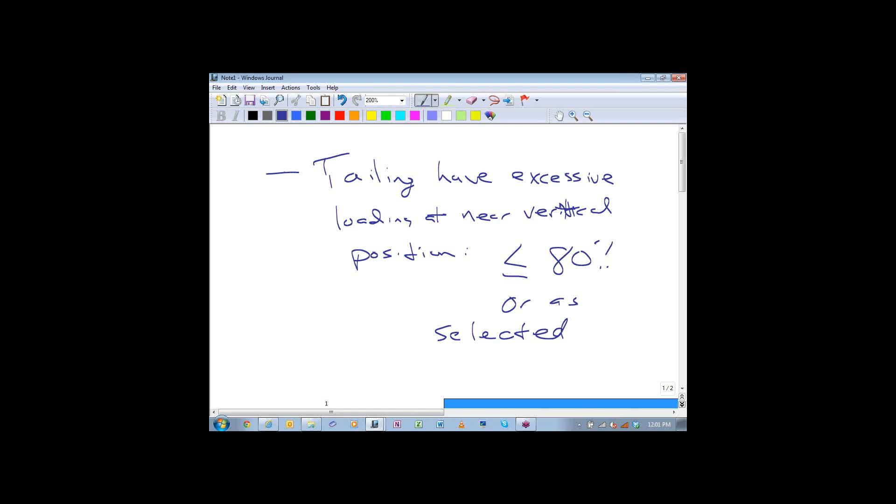Mike, do you have a comment on that one? No, I think Jim's hit it on the head. It's going to be set up in their procedures, whatever they've prearranged and decided, and they're going to measure it all out to confirm that they won't have to boom down, or they'll have to crawl up to the load in its near vertical position to assign that. So that'll all be determined in the pre-planning process.

Okay, great. This question came in, seems a little tricky to me, but Ramesh was asking: is swinging possible after lifting a load with two 1100 series American Hoist guy derrick cranes?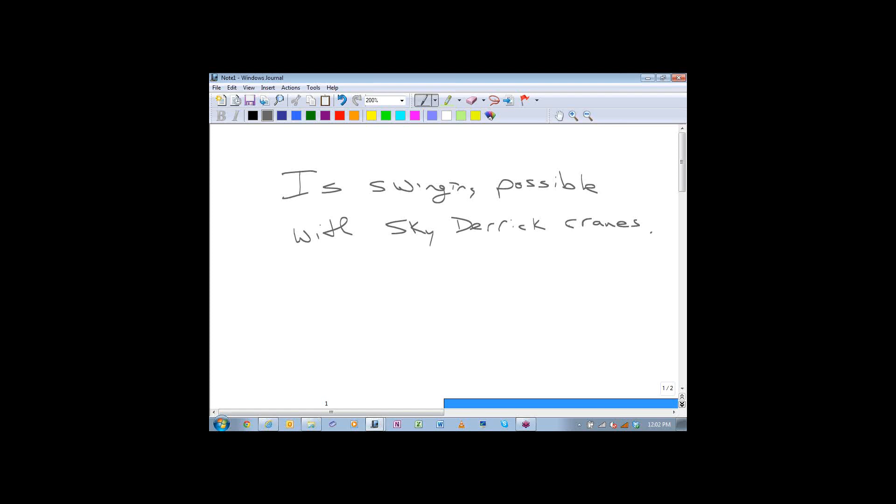Swinging is, you mean after the load's been set? I think it was right around when you were talking about, Jim, when you have dueling booms and one boom's got to clear the other one first. I believe that's when he wrote that question in. So swinging inside or close by the other boom. But Ramesh, if you're listening still, please clarify. I don't know if you guys have any thoughts on that.

I'm just not sure what the question is exactly. Yeah, I think he's wondering, is swinging possible while in the air with two cranes, and then he called out a specific crane type. Oh, okay. So I don't know if we need any more information from him or not.

Okay, now that I see it written, I thought you'd said guy derrick, but you said sky derrick. With the sky derrick, you have a little bit of swing, but not very much, because you only, in effect, have one guy in the back. So I could go maybe 10 degrees either way or so, but it's just enough swing to compensate and get where you want to.

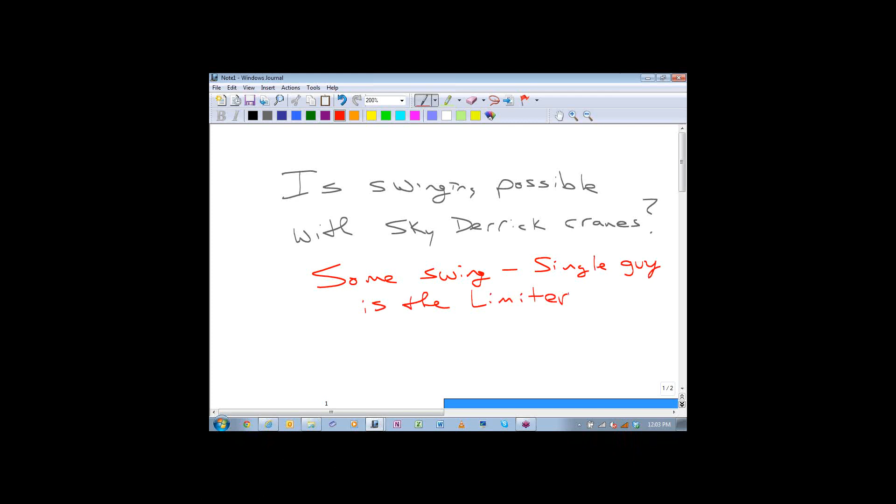Okay, awesome. Let's see, Ryan asked: what is the minimum distance of the anti-two-block from the boom tip? That just depends on the crane.

Okay, Jim, have you been in a circumstance where they've disengaged the anti-two-block device for a critical lift based on headroom? No, but I've been in some situations where it got pretty close.

Yeah, it's really not advised, I would think, as a general rule. Because we get so focused down at the load level and all the things that have to do with the load, not contacting the boom, making sure the hoist lines are plumb, and all those things, to also be trying to worry about having disengaged an anti-two-block device and to make sure we don't two-block the thing, that just compounds everything four or five times, I think. So it seems like it's there for saving ourselves, and it's probably very ill-advised to try to disconnect that just to get another foot or two of lift.

Yeah, good point. Well, very good. I think that's it for the questions, unless anybody else would like to chat in some other questions.

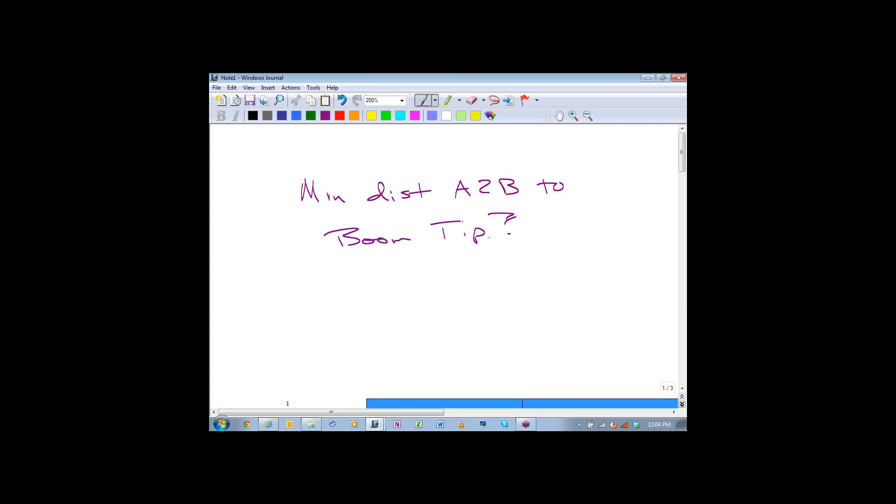Yeah, I've got a question for Jim. Jim, you were probably a part of the American Society of Civil Engineers. They did a crane operations book a few years ago, and I was curious. I was looking for it the other day, and it looked like it had been removed, or not retracted, but maybe removed for rewrite. Are you familiar with that? You're a member of ASCE.

Yes, well, I did a lot of that, and in my opinion, it never got finished. It was published to meet a deadline pretty much, and it had some good stuff in it, but there were some things that were maybe hard to understand.

I've got copies of it. Has it been pulled off for circulation or retracted, or I mean, is there a public availability or its status? Do you know?

I'm not sure. It was never really published as such. It was part of an OSHA Susan Harwood grant, and it was supposedly something to be developed on a future grant, and it never got past the first stage.

I see. Okay. All right. Good. Well, we'll look for it in the future if it becomes available. So let's see. Zach, any other questions? Nope, I don't think so.

Oh, wait. Well, I guess Bob, hey, Bob Berry had a question. He was wondering if there's a formula for tailing capacities.

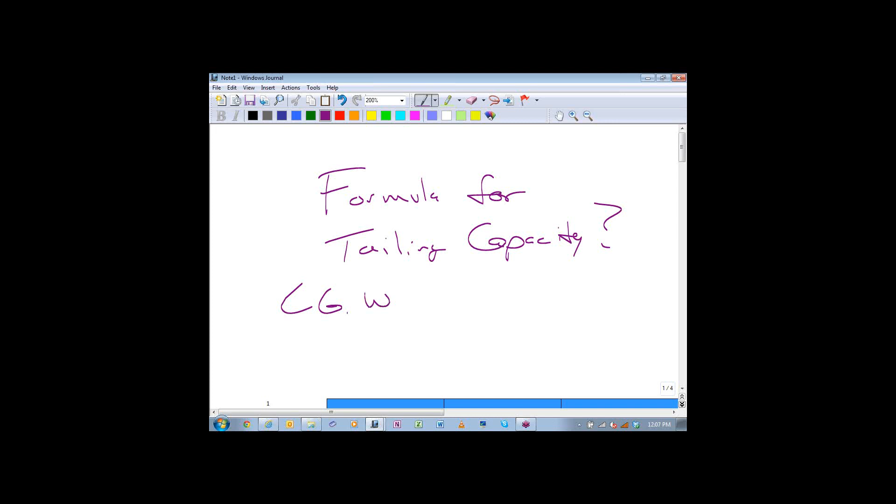Well, what it is, the geometry of each piece, let's say if it's a pressure vessel, it's going to vary between with the CG, the diameter, the location of the lift lugs, the location of the tail lug, and it just has to be run out for any particular case, and there's not really a formula as such, although one could make formulas for several different general types.

Jim, if I can comment, there in the new ASME P30 lift planning document, it just went through public review, and there are 10 consideration points for single and multiple crane lifts. And we actually did not state a percentage for a single or multiple crane.

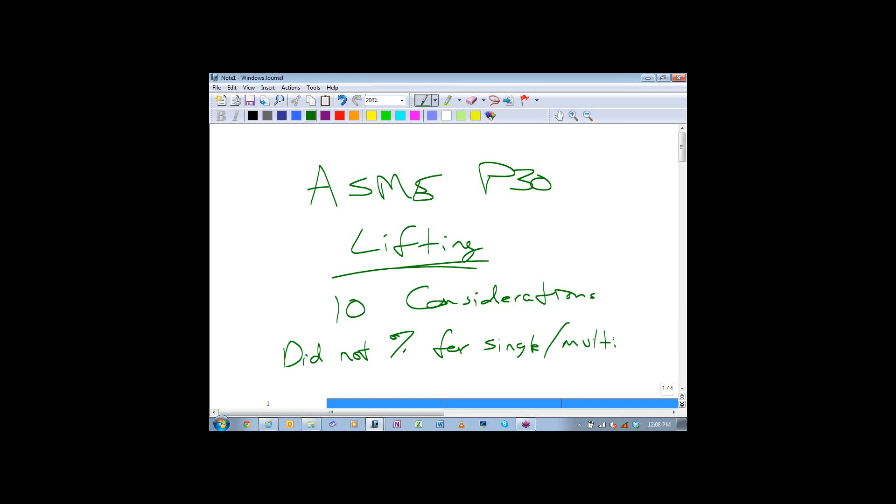And really, I think you've hit on it. It's going to be up to the crane owner, the project manager, project superintendent, crane manager, and it's going to be something, first of all, an engineering decision, and then a team decision with the operators and everyone else, because you've also got to get buy-in and somewhat and some acceptance of capacity. But we opted not to put a percentage in there because we didn't want to paint the industry into a corner to stay within some specific percentage.

I mean, there's probably, and I'm sure you've been on cases where you've had say 2 cranes both at 90% or 92%, or one's 95 and one's at 91 or something, and we don't want to put a percentage in published print because even if it's a should, sometimes people take shoulds into shalls, and if we say publicly shall not exceed 75% or should not exceed 75%, a lot of safety folks around the country will start to use that as their mandate, and we don't want to hamstring the industry by getting a percentage there.

I think Jim's absolutely dead on about, hey, it really needs to be the project decision and what they can live with, and they'll make a lot of consideration points that will affect that. It could be wind, ground and soil conditions. We believe they're solid, compaction tests, everything's been done, but it may be just not the fuzzy factor that you just don't feel all that good about going past 90, and that may be their limit.

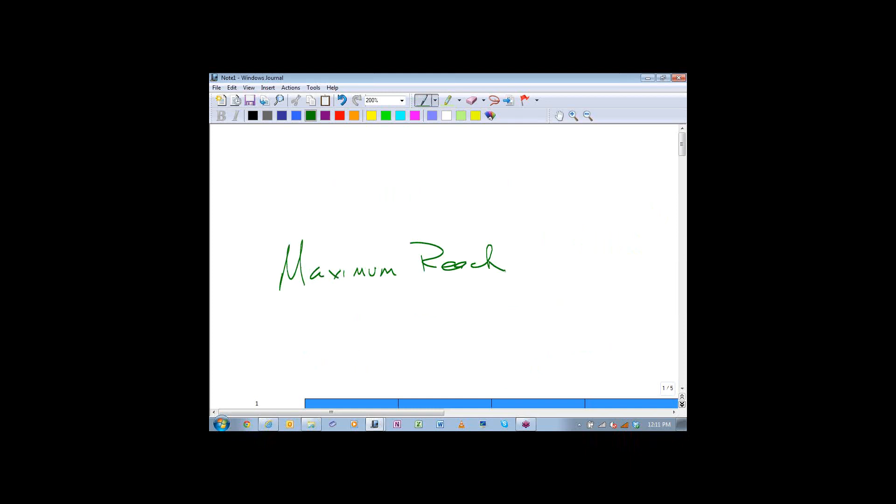Yeah, I want to share what Ken wrote from BP. He mentioned MaximumReach.com has a calculation program for free, and it's for uprighting loads. They've built it out a little bit. Mike, have you heard of that site? I have, yes.

Another comment Eric had was about a graph that Jim showed on tailing capacities earlier, and how can he pull that up. I want to let everyone know you'll get an email today with a link to access the recording of this presentation as well as the presentation Jim went through. We really want to thank Jim for doing the presentation and making it available to everybody. So tons of good resources in that presentation, and you can also download all the other presentation files like I mentioned before. Ryan asked a couple other questions we can probably answer, and that looks like the rest of it. I'll just cut it off there.

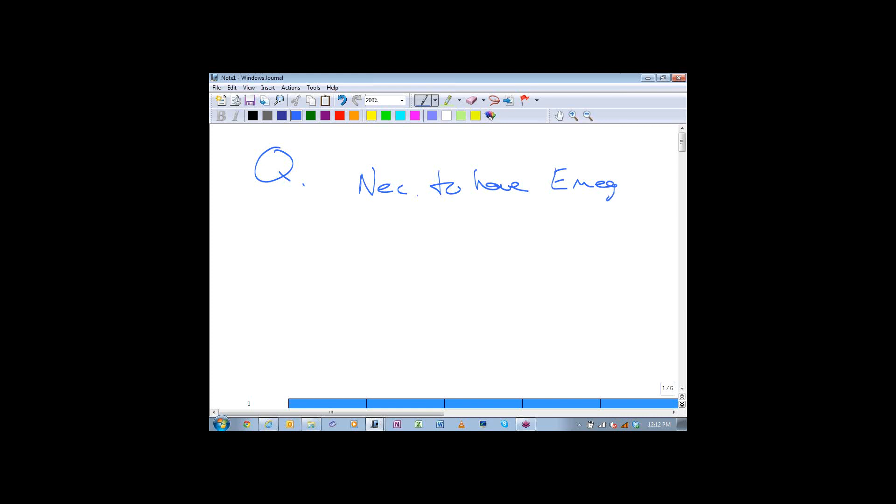Ryan asks, is it necessary to have an emergency action plan for every multi-critical crane lift? Wow. To me, I would just say it would be a function of the situation that you're in.

I'll comment, Zach, on that. One of those 10 consideration points we mentioned under ASME P30 - the 10th point is having an emergency action plan on site, but it doesn't have to be with the crane and rigging crew. It's actually a site emergency action plan, and the crew needs to be informed. As Jim mentioned, you could have a gas release or chlorine release or something else you've got to evacuate for, maybe even with the load suspended. I think Jim and I would both agree, we don't want to be emergency action planning for crane failure. We take contingencies into effect - we clear people out, stop any production flow lines that can be stopped, de-energize power lines whenever and wherever possible, clear out buildings as needed. You don't plan for failure, but you are respectful of the existing site emergency action plan based on a general announcement, and the crew needs to react to that.

Anyone who does a good lift plan should always keep in mind and make it a point to think of anything that could possibly go wrong during that lift, and what you've planned into the lift proper to avoid that.

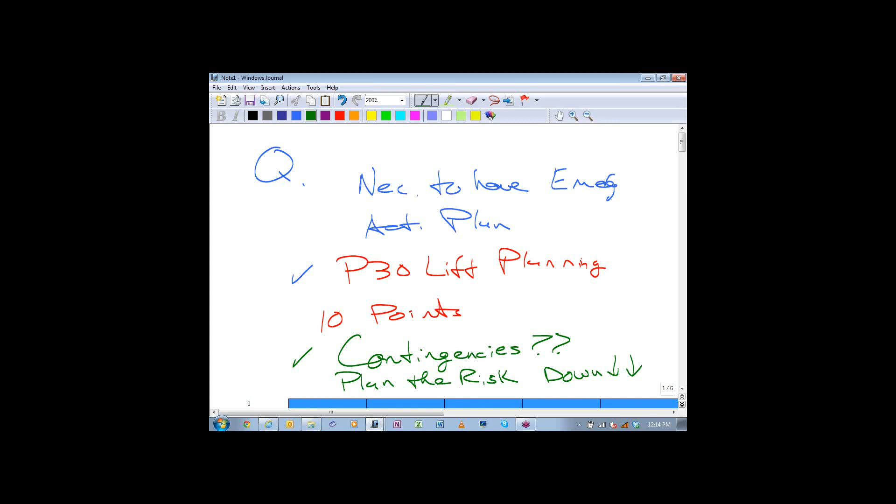Okay, terrific. Well, the last question I'll field is straightforward. Ryan asks, are boom trucks allowed to do tailing lifts or tandem lifts with?

I don't see why not, as long as they're within the range. They're basically cranes just like other cranes. I'm sure it's going to be limited, but it's sure better to tail than just put it on the ground and try to drag it. Sure, if it's within capacity and everything, it's absolutely fine. We don't want to, as Jim said - the alternative is to drag it up to the head crane, and you don't want to side load or snag the load, or all kinds of bad things can happen if we don't help it a little bit.